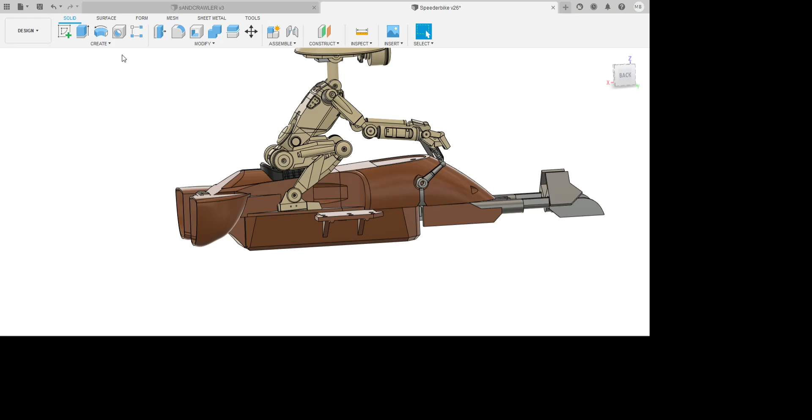Okay, let's talk about the Pit Droid. So this is Pit Droid Racer. What I'm not going to do is go through the drive builds, so the wheels and tracks and all that kind of stuff. They're covered off on the Brew and the Eggbot fly-through videos. So I won't go through this. I just want to go through the main model for the speeder bike and the pit.

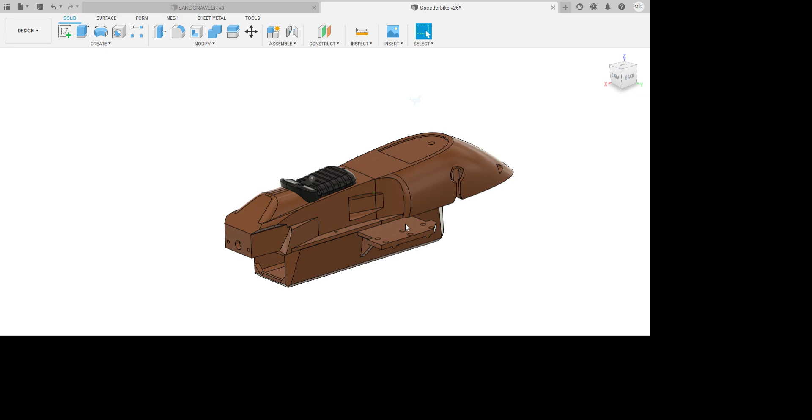So I'm going to just get rid of the Pit Droid for a sec, and we'll talk about the main frame. So the main frame is quite simple. You've got a base frame, and then you've got some other parts. I'll just get rid of some of the greebles that are on there so you can get a bit closer to looking at how the actual core build really is. So there we go. So really the main frame consists of three parts, which is this main frame at the bottom, and then these two upper skins. So if we remove the front skin and the rear skin, that's your main frame.

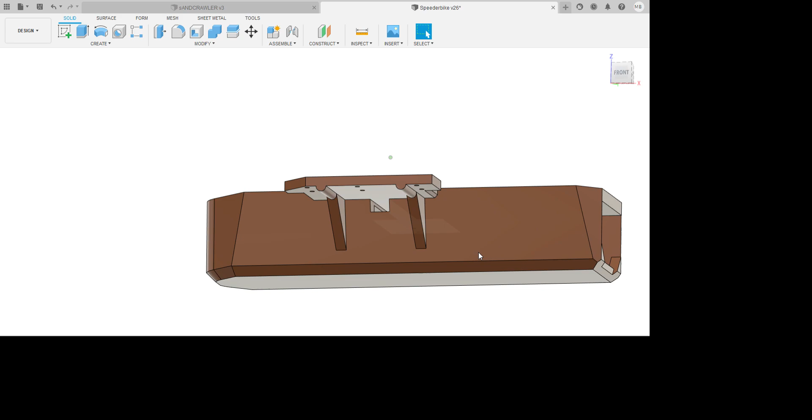Obviously it prints this bit bottom up, you've got bridging that goes across there, so it's all no supports. There's enough room in there to get a battery in and to get some of the electronics in there, and then effectively rather than having the metal bars through, I've now got a printed frame with these which screw into the same places where the original brackets did. So it's a bit of simpler assembly, and then you've got two holes there and there just underneath the wings, and they're obviously for the drive cables to get them all into the centre bit. Front compartment for RC, and then battery will go through. And then effectively that's your main frame.

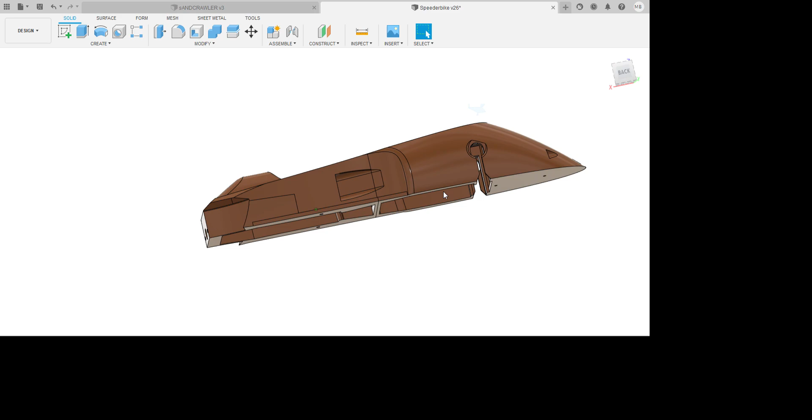So you can assemble your main frame and you can put your wheels on it, and then what you do then is you start to assemble the top half. Now the top half is made up of two skins, the front skin and the rear skin, as you can see. They are bolted together through these little holes here. What I tend to do is glue it, two-part epoxy, and then get some 3mm bolts through there with nuts on the other side, sort of 10-15mm. I've also put a 15mm hole through there which wasn't on the beta files. That's so that you can run the servo cables from this front part into here. You will need some extended servo cables, just to get it all to the one part where your RC is.

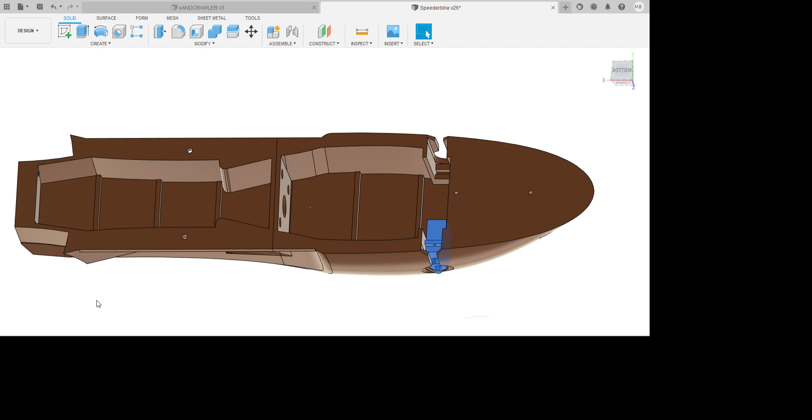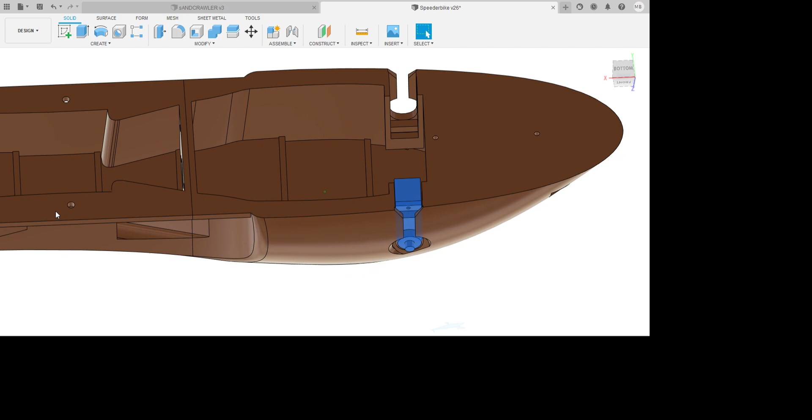Now what I've also done on this one is the servo mounts. I don't know if you can just see there, but the servos just slot into them grooves, and the top tab goes into there. So in this model the front servos are not screwed in at all. What you do is you pop your two servos in, make sure they're in that little latch there, and then there is a servo mount which basically clicks in and locks that in place, and I can just show you very quickly how that kind of works.

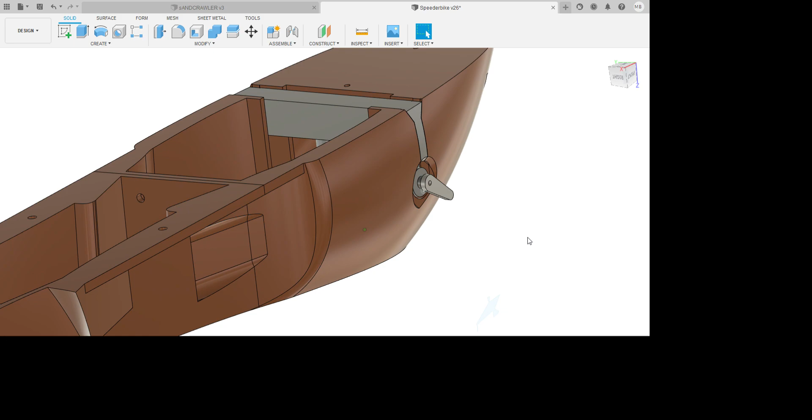If I go to a bit of sectional analysis, the servo drops in, clips into there, the servo is closest to the top, and then that slots in. It's got a little groove again for that other part of the tab, and then it bolts in or self taps in from the top with an M3 screw, which holds those servos nice and tight. So that's just how that goes in. So you drop your two servos in. Obviously center your servos as always with a servo tester or whatever. Screw that in, and that will hold your servo in on both sides. The servos are for the main drive arms, so you get animation on the arms, and then these just bolt together. So that then creates your main frame.

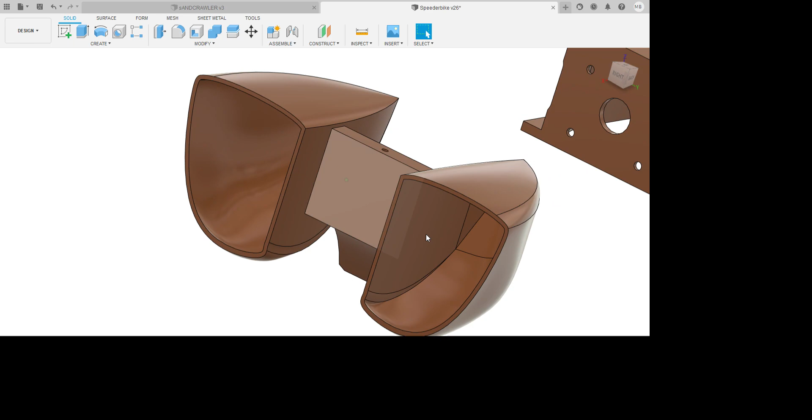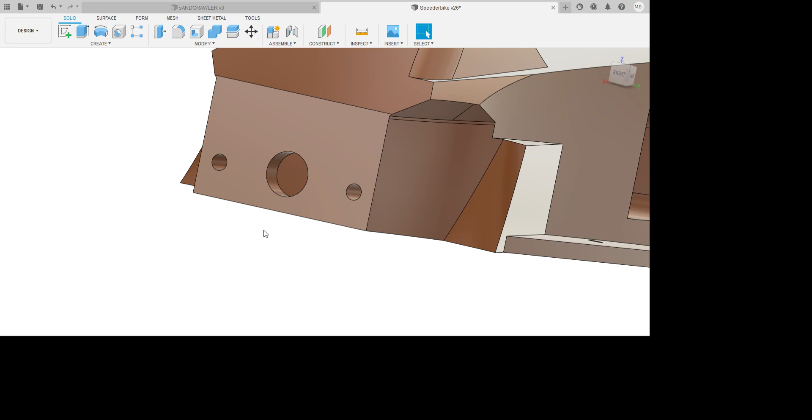And then on top of the main frame, at the rear here, you've got a magnet and two locating pins, and that's for the rear jets. So the way the rear jets work is you've got a hole there which you glue in a 10mm diameter by 5mm deep magnet, and you also put in two little long M3 screws through there. And what they actually do is they just stick out, and then on the rear skin you have two little holes here and here that they'll drop into. Not designed to screw into there; they're just designed to sit into there. So with these magnets, you can actually pull the rear jets off, or if they catch on anything, they'll just pop off, and you just stick them back on with the magnet.

Because they're printed in this orientation, this plate here is a bridge. It'll look pretty messy, don't worry about that. What we've got is a greeble then that sits over the top of it. So the greeble sits over the top of it, you screw it in there, and it just tidies that back up and gives you a nice kind of finish at the end. But as I said, the rear greeble and the jets will come off and on. Okay.

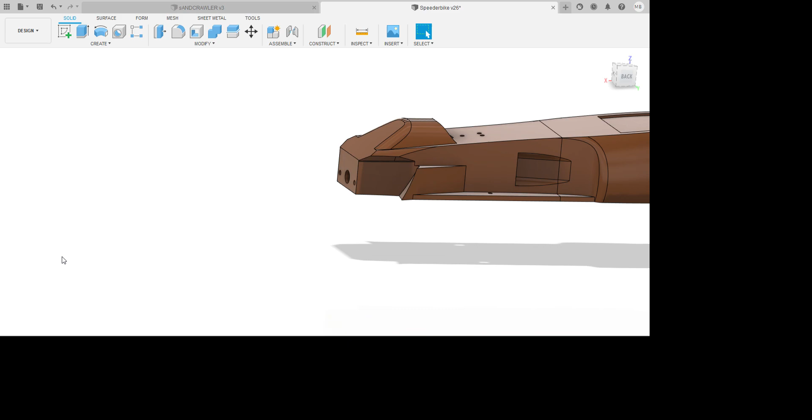So once you've done that, you put your magnets in, you bolted it all together. That's pretty much your lower frame completed. Two servos in either side, and then you've got the drive arms. Now just talk through the drive arms.

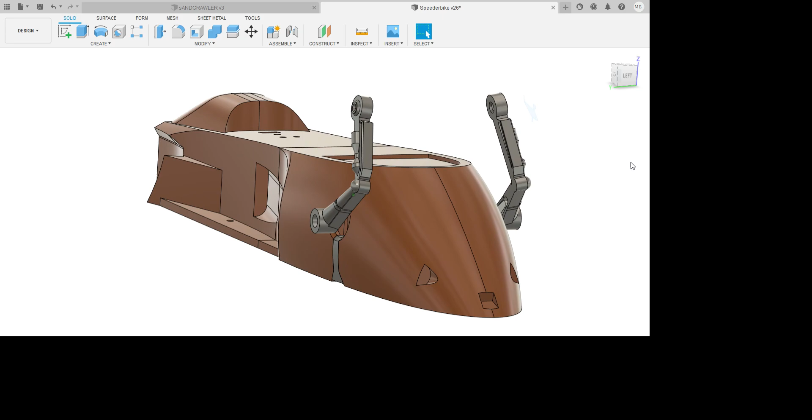So the drive arms are actually at an angle. So if you look at it from the front, they're not straight. They print with these bits here flat, but the little groove for the servo is actually at an angle. So if you look at how that servo horn is actually connected, let's just get rid of the magnet so you can see the servo horn doesn't sit straight, it

sits like that. 2-part epoxy, glue it in and make sure that hole there is centered, and then the reason for that is it gives it a better angle for the hinges for the arms. It just looks a bit better with it not being completely straight. So both of those go on, glue them on, center the servos and pop them on.

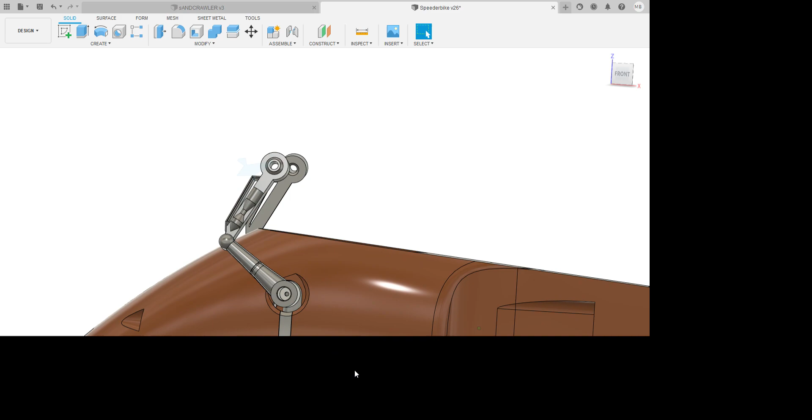At this point I wouldn't put the screws in until you've got the driver on, you know, the pit droid, so you can actually make sure you get that right. Single screw through there which holds that bracket in. I haven't done, but I will do a plate that covers over here that's got a little bit of a console on, just to tidy that up. I've not done that yet, but hey.

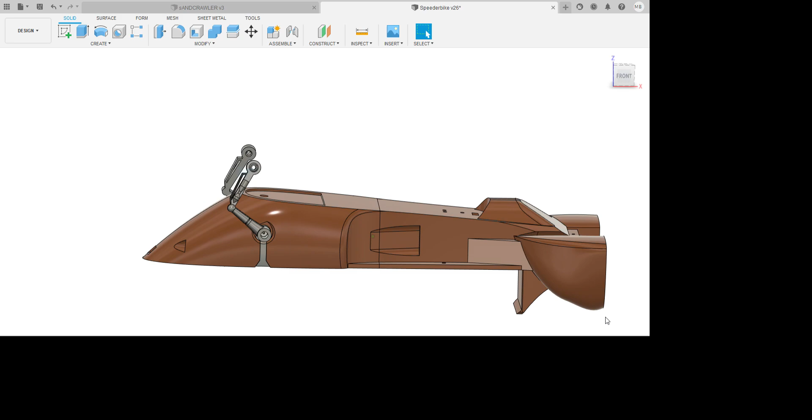And then your rear skins pop on there by magnets, and then effectively that screws into here with 2 holes there, and then there's a little bit on the front one. So those 2 screws there also hold the pit droid's feet. So I'll talk through that when we get to the pit droid.

At the front we have the vents. Now the vents is again a 2-part print. This one prints with this bit to the base, and then that just clicks on and you can glue that into place. It holds in place with 2 screws, one there and one there. They both self-tap into that plastic, and then when you put the main frame on, you can see that can

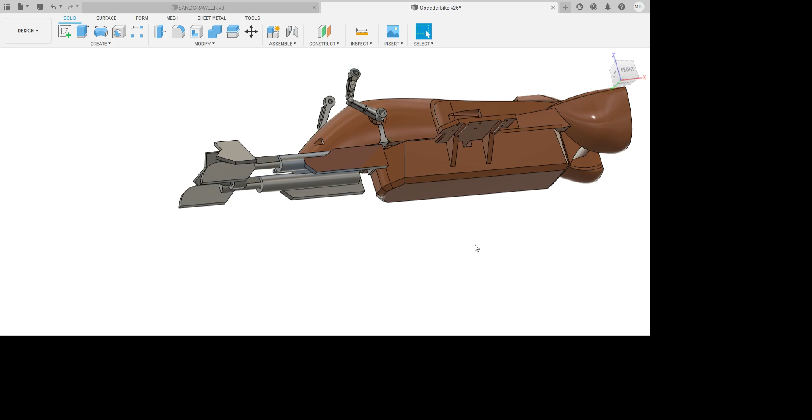also screw in there. So this top bit is held on with 1 screw at the front which holds this piece here on once this is all assembled, a screw there and a screw there which go through the pit droid seat, and that's it really. So if you want to get it off, it's fairly easy to take off. You've then got that rear greeble I mentioned, and then the only other part really is the seat.

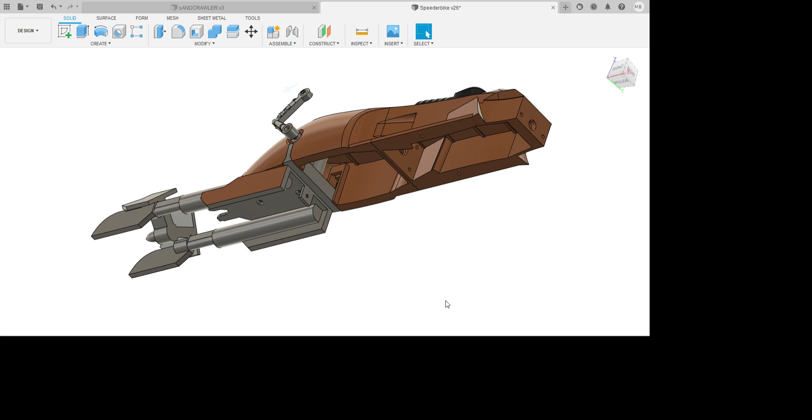At this stage, don't attach it to your main frame. You wait until you've assembled it. So when you've done your main assembly, your rear jets will be on via magnets, and it'll go onto the main frame. So really, you want to just assemble this piece like this. Then you can start to work on the pit droid.

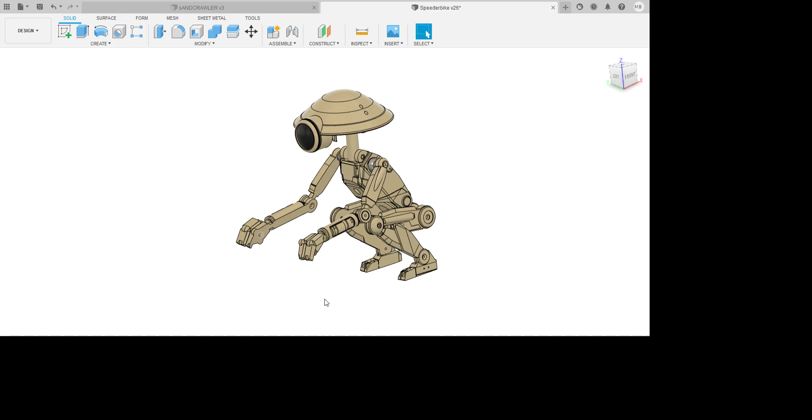Okay, so I'll talk through the pit droid. So here's the little fellow. Let me just first of all remove this speeder bike, and I'll talk through how he's made up. Start with the easy parts first. The arms. You've got 2 arms.

These are from the great model from Dave Moog, who gave me the model to play with. I've altered the sizes and scales, and I've tweaked it and changed it, so it's not the same model as Dave's at all really, but he's provided the core layout and design for that, which is fantastic.

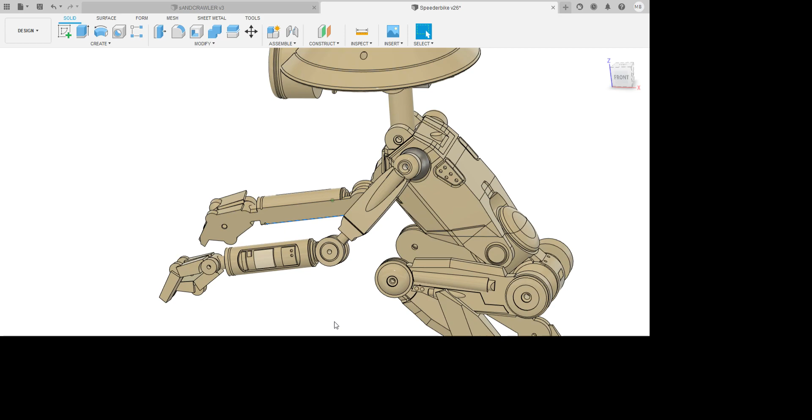So these arms print flat, single bolts through from the inside to create this hinge. You want these arms to be loose and floppy, and then you've got a second arm comes up to there, and this arm bolts on to here. I think it's about a 25mm bolt that goes through there, and these shoulder hubs are loose. All this is loose, it's just held together with bolts. You don't need to glue anything.

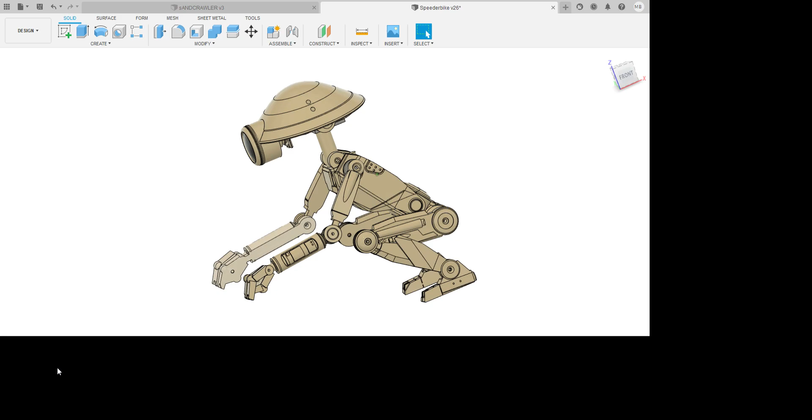So that's the arms. The arms are fairly simple, and can be attached at any time. So I'm just gonna remove the arms for a second, you monster. Let's get rid of the shoulder hubs. We'll go through the legs, which is the other easy bit really. The legs are one piece, so as you can see they're printed like this.

You couldn't bend the articulated pit droid like this because it would clash into each other, but what we've done is just done that as a single print for you. And then you've got some little hips, again similar to the legs. You don't have to actually tighten these on hugely. These won't move anyway, so you can put a bolt straight the way through there, get it nice and tight, and then effectively that's your legs.

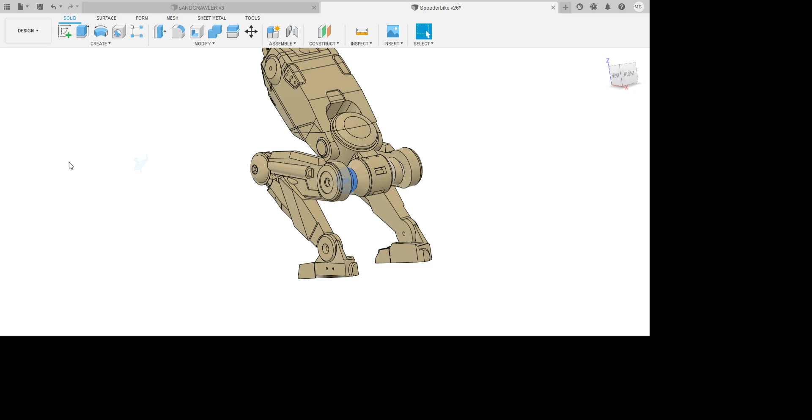But the assembly, your legs you put on last really. So when you're assembling this, leave your hip and legs off, and I'll show you why when we actually come to put that in. In fact, I can probably show you now. So I'll show you how this fits onto the speeder bike.

So the way that the pit droid fits on is, as you can see, there's two little screws, one there, two bolts. These are M3 bolts. They go through the feet, they go through this frame, and then they self-tap into that main frame. So effectively it holds his feet on, onto there, right the way through. The feet are on solid. That's how the feet are held on.

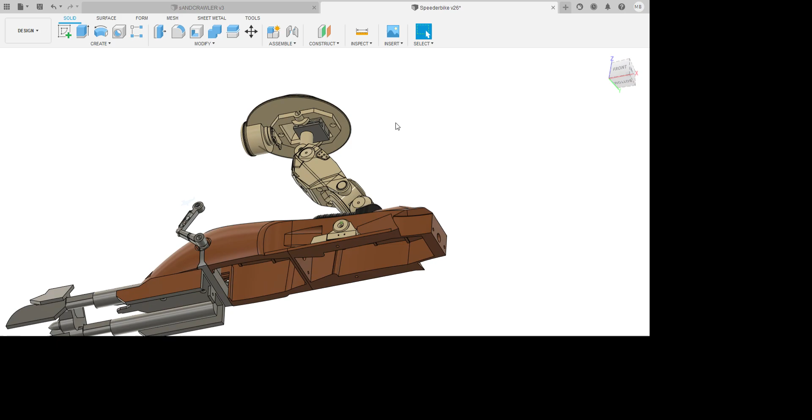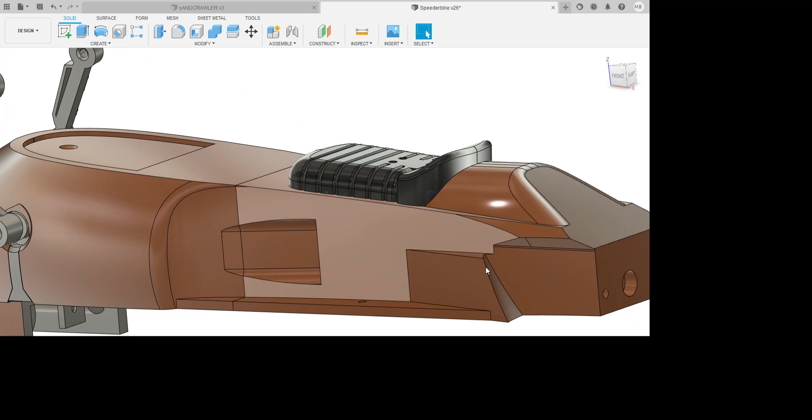The main body, once you've assembled this, and we'll talk through this assembly, your assembly is held on, just remove the pit droid, there we go, is held on with 3 bolts in the seat. 1, 2, 3, and these go right through from underneath. You can't see the holes there because I've put a very thin layer on to stop the bridging, but you have 3 bolts that go through the seat, and they screw into the base of that pit droid, because that's a pretty small area to hold that pit droid up. So you've got some chunky old screws that go right the way through there to hold this on.

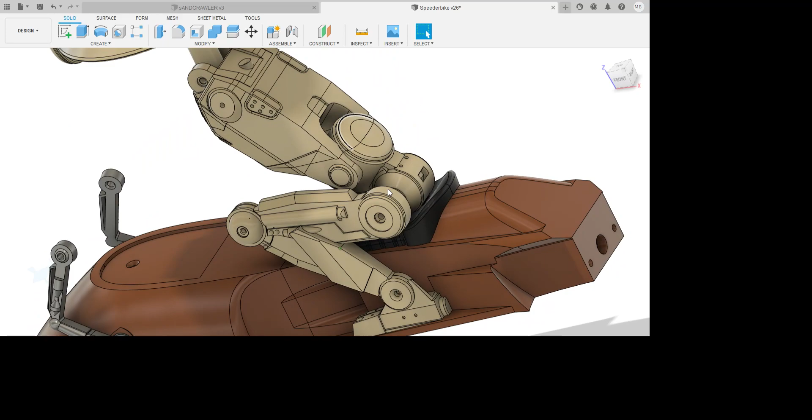So that part screws on first, then your feet screw on, and at that point then what you can start to do is attach the legs, which bolt into there and then bolt from the outside of the feet on. Again, M3 self-tappers, as most of my builds use at the moment. And then once you've got legs on, your legs kind of sit like that. The legs also give a bit of extra stability to the body. So that's how the legs go on.

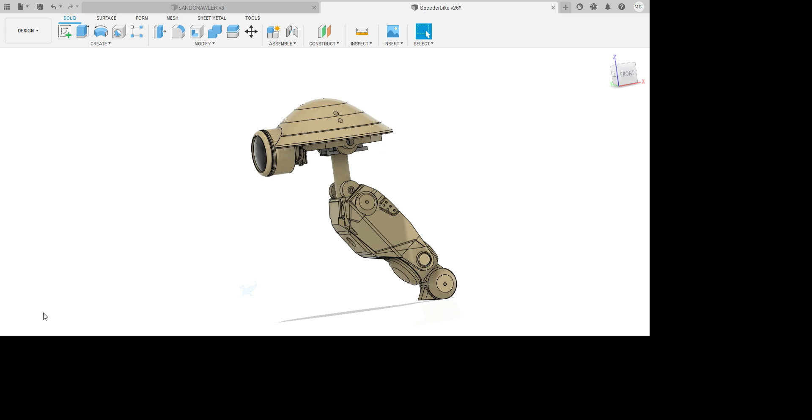Right, now let me just talk you through the actual body of the pit droid, because all these, they're almost like greebles, the arms and the legs. They're fairly easy to pull together, but we'll talk through the main bit. I'll just take his head off, because again his head just bolts on, so let me just take his head off for the time being, and I'll talk through how this is actually assembled.

So this is the main mechanism. You've probably seen the videos. His head turns left to right, and it nods, and it goes up and down. So this is how this main mechanism works. So before we start to look at how that's put together, I'll just show you so you can get a visualization of how the mechanism is by just taking a bit of a cross section.

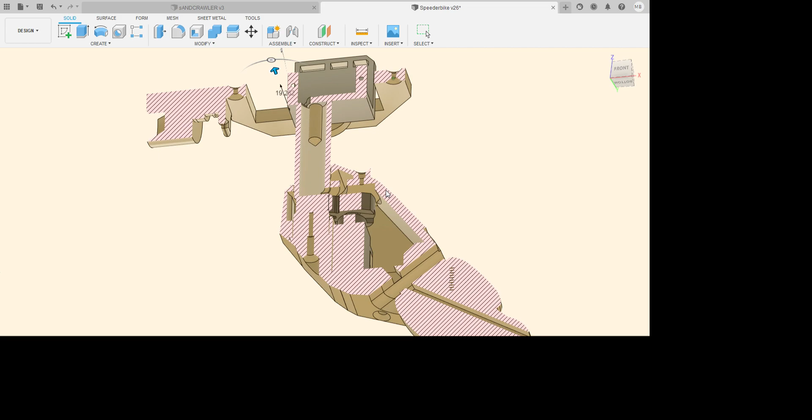Oops, not that much of a cross section though, mind you. Bear with. All right, there we go. Let's pull that back to there to get about halfway through that neck. Okay, so what you've actually got here is, if you can see, there's a servo in the bottom. The servo has a gear attached to it, and that's probably not the easiest way. Let's see if we can see this a bit clearer. There we go.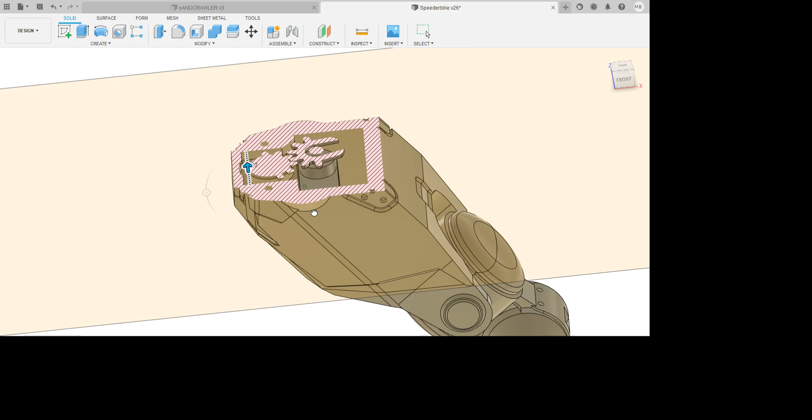So if we look into the body, you've got a servo, which you can see there. On top of the servo is a gear, and the gear meshes into another gear. And this gear is actually part of the neck. So if I continue the neck up, you can see then that the neck goes in. So the way this works, if I just remove a couple of panels, is servo in the bottom, gear, and a neck. So that effectively allows you to turn the head left and right like that.

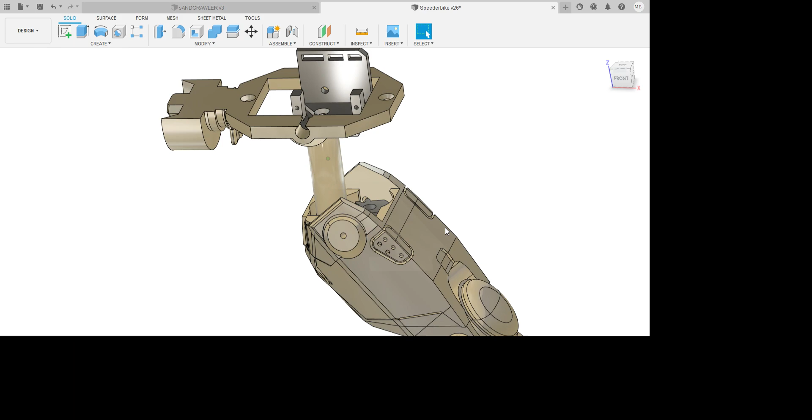Then what you've got in this top bit is another bracket here for another servo. So you've got a servo that goes into there, and you glue a servo horn in there. You also put a bolt through this hole into there, so that then creates the hinge that allows you to, if I can do it, nod the head as well. So that's how the head turns round and nods. 2 servos, one to do the nod and the other one to do the head turn.

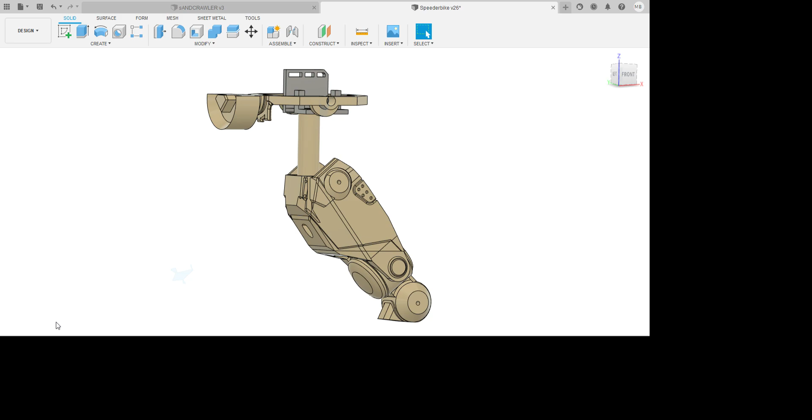The way we assemble this is the actual body comes in 2 parts. So there's a lower body here and an upper body there. Okay, so the first thing that we do is, just get rid of some parts so I can see how we assemble this. So the first thing you do is you just drop your servo into there, as you would do.

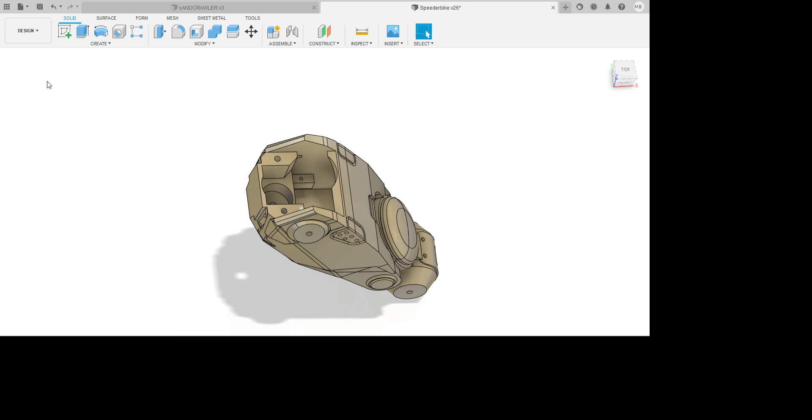The servo itself is an MG90 servo. It drops into there and it screws in through those 2 holes. The cable for the servo, which comes out of this side here, if you can see, will slot underneath this little gap, and then what you've actually got in the body is a little channel at the bottom here, a little hole. So what you need to do then is just drop the servo cable through that little hole.

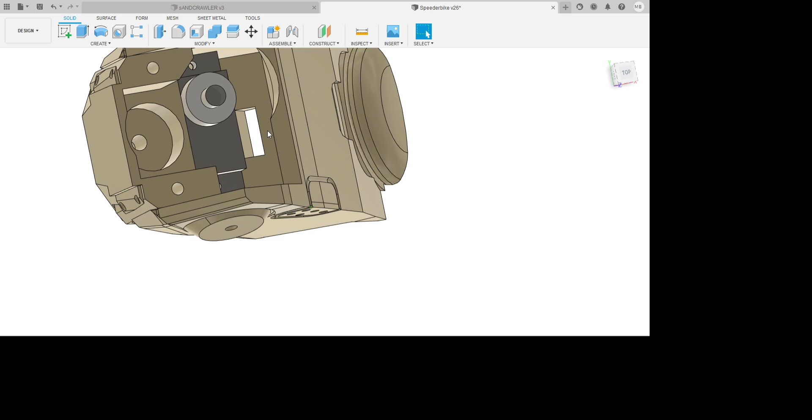So the way you do it is pop your servo cable through the hole. Once you pop your servo cable through the hole, pop your servo in, 2 screws, tighten it up, and you should have a cable dangling out of here. Okay, now the next thing to do is to get a good length of servo cable, because you'll need a second servo cable for the head. And what you do is you thread that through that hole along with the connector for this one.

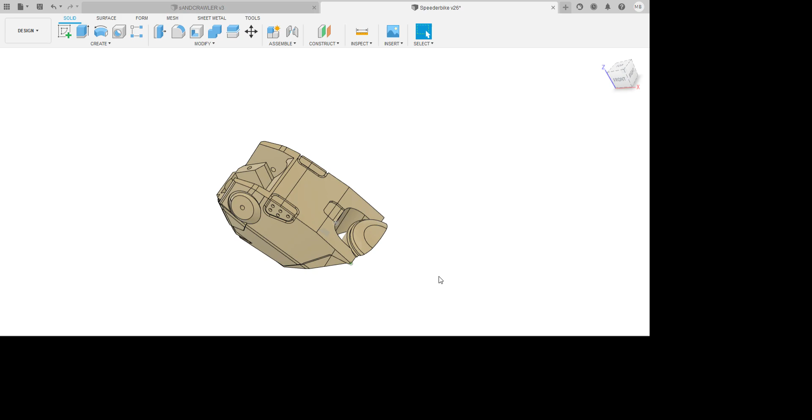So what you end up with is 2 cables. You end up with the actual servo cable, and then just a length of servo cable not attached to anything, going through there, which is going to be connected to your upper head. Then I'll show you how the lower part fits on. So the lower part fits on with 2 bolts, which are self-tapping, and that holds it in.

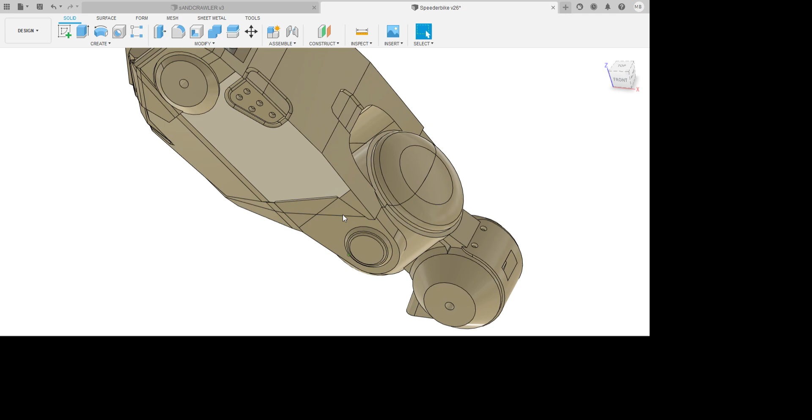And then you've also got a hole here for an M3 set screw, so a 3mm set screw or grub screw, which is 10mm long, and effectively that holds that body together with 2-part epoxy. So 2-part epoxy, you glue it, and you can get that fitted in near enough straight away. Before you do that, what you want to do is thread the cable. So you'll see there's another hole in the body here.

Now, if this is tight, you can sometimes get a needle file to file through there. There's some overhangs in there that may mean that when you push the servo cable through, it's not completely smooth. But push your servo cable with an end, i.e. the servo cable that does this servo here, right the way through, so it comes out and it'll stick out through here. Then it'll come out through this hole and out.

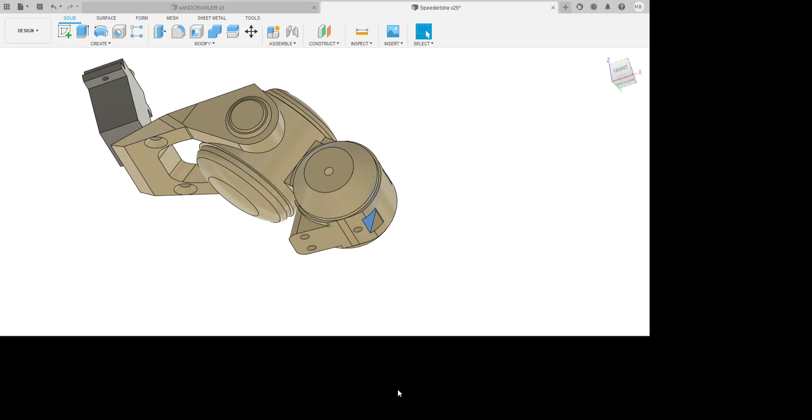Then what you do is you take that servo cable and you push it back in again down this second hole, so it comes out here. So you end up with the cable gone right the way through, bending down and actually coming out that bottom there. And then the second cable, which is just a 3/4 servo cable without any ends on it, goes the same route. So it goes straight down, out, back in, round, and out that bottom.

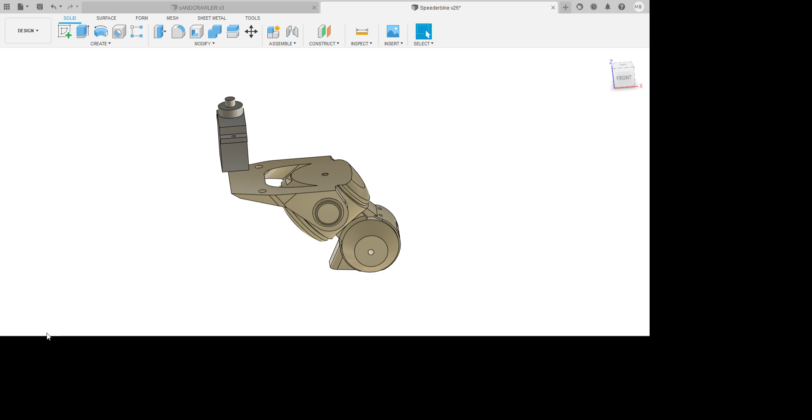So effectively, once you've then got the main body on, the 2 cables come right out at the bottom there. They bend round there. You'll probably see them through that little window. They'll fit between that hole there and that gap there, and then they'll come out into this space here. One will connect to this cable so that you can turn the head. The other one, I'll show you where that routes in a second.

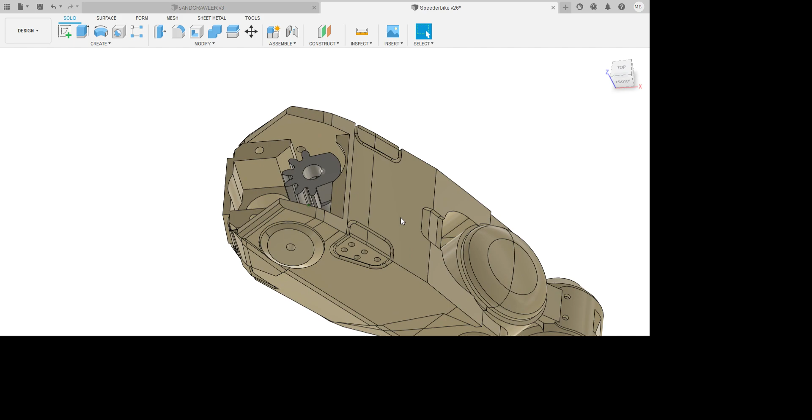So once you've got the cable sorted out, the next thing you can do is put the gear on. So we can put the neck gear onto the servo. Again, simply, it's got a little groove on the bottom, and you can glue a servo horn onto there. Once you've got the servo horn in, make sure the servo is centered and angle it like that. So what you want is the gear pointing straight towards that little hole there in the middle.

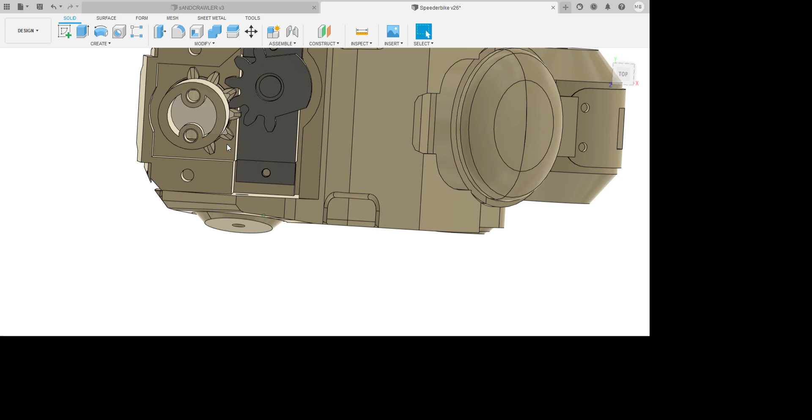And then what we can do is grab the neck. So the neck goes in. The neck drops into there and it meshes, as you can see, with that gear. Again, make sure you get your servo angled like that. So you want these 2 holes here on the neck aligned to those 2 holes in the body, and that's your servo neck in.

Now before you put the servo neck in, we've got some cabling to do, and what we're trying to do is get the cable to come out at the top there so we can use that to control the nod servo.

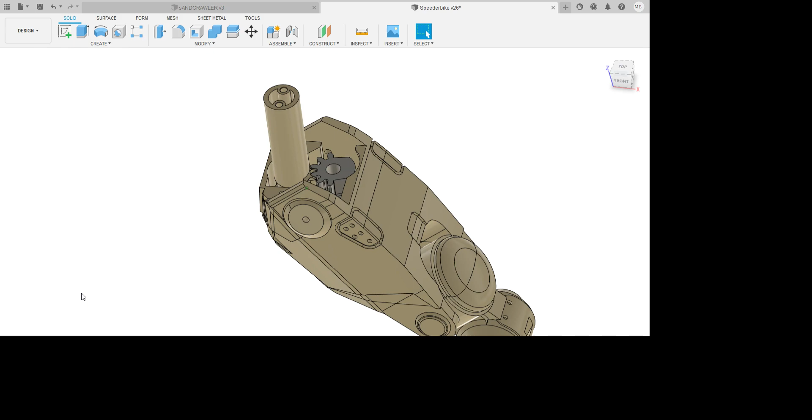So I'll talk through how that cable goes. Okay, I'll just show you how the assembly goes. So we've got 3 parts to this assembly. We've got the neck, we have, find the parts that I need, we have the shoulder cover, there we go, and then once we've got the shoulder cover, we've also got the shoulder.

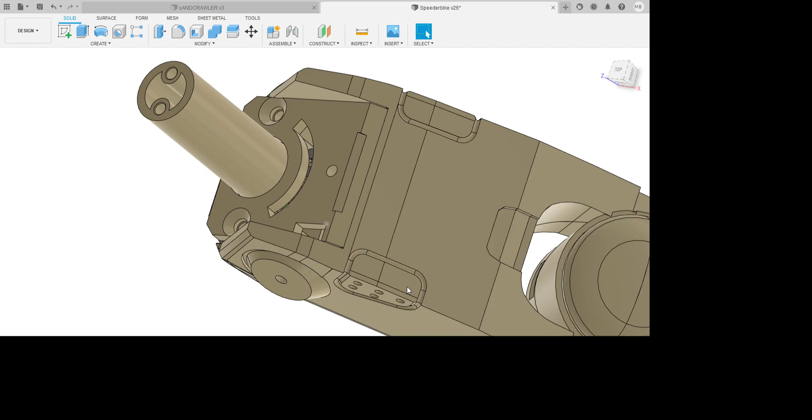So there you go. So the way that this works, we've got a happy smiley face, look, it's good, isn't it? So the cable that's from the bottom comes out of this hole here. Doesn't need to be threaded through this because this is an open hole. So you're pulling the cable out of here, and then it goes back in through the smiley face. And the smiley face is really designed so that you can push the cable through and it'll allow the head to turn, and it sort of drags the cable around.

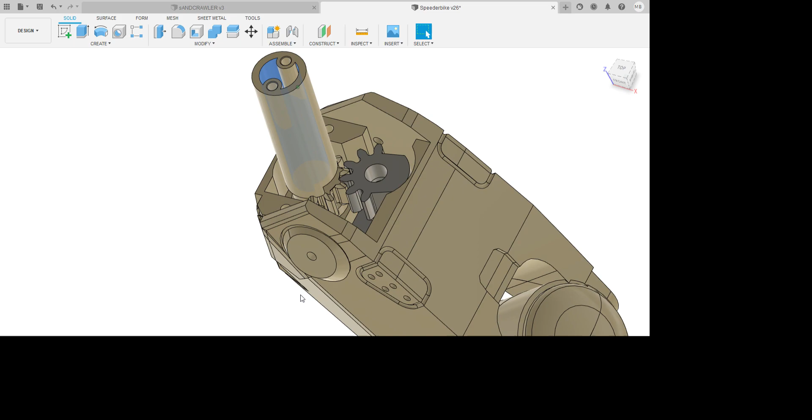So if you can imagine, up out through here, back in, looped through there. Once it's looped in under there, you'll see there's a little hole at the bottom of that gear. It pushes into that hole and then it spins and it goes right the way up and comes out of here. Okay, so there's a couple of ways you can do it. You can feed it through there first from the top out through there, put it through that shoulder plate, push it back up through here and then drop it back down and thread it all the way through so it comes out the bottom.

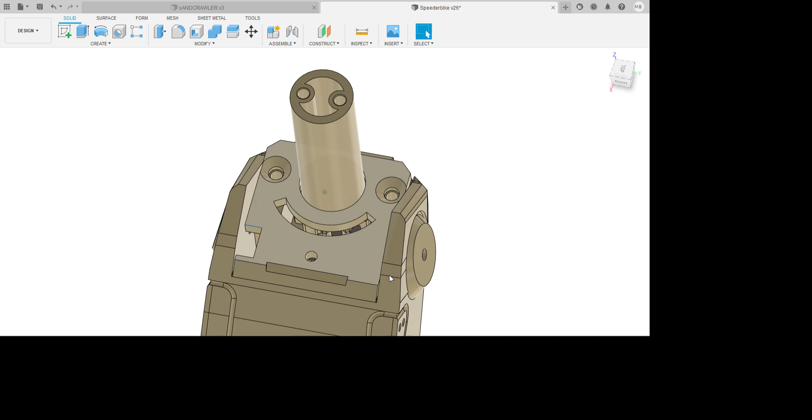But that's the length of the cable, so through there, all the way through the body, into that space, out through this hole, back down through that hole, into the hole in the neck, and out the top of the neck. And what you'll end up with is a little loop of cable that goes kind of like that. Now there's quite wide grooves on there, so the whole cable doesn't shift left and right when you turn. It's just to give it as much space as possible.

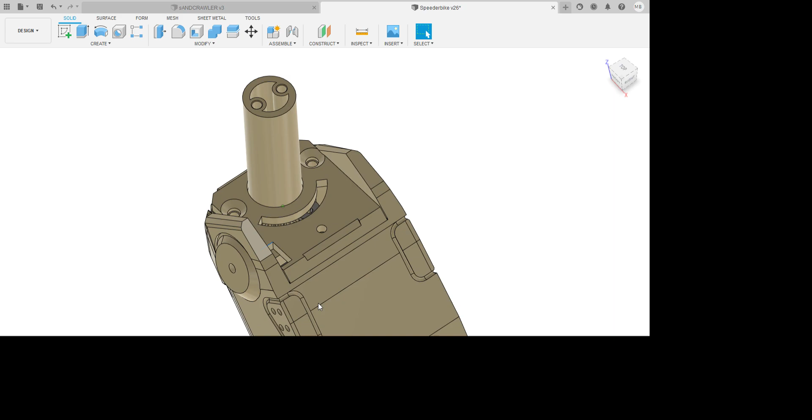But what you want to do is attach a servo tester to that head turn servo. Make sure that head turn servo turns relatively freely with that cable on, because what you're then going to do is this shoulder cover bolts in with 2 bolts there and there, and 3 bolts self tap. And then finally you've got a shoulder cover that goes over that.

Now the shoulder cover, if we look there, as you can see, has got this gap so that it allows the cable to come out of here back in there. There's not a lot of room, you've just got to make sure that you've got enough space there for it to be moved relatively freely. I built a couple of them, it does fit, it's just sort of playing around with it to make sure that you've got enough movement for the servo, etc.

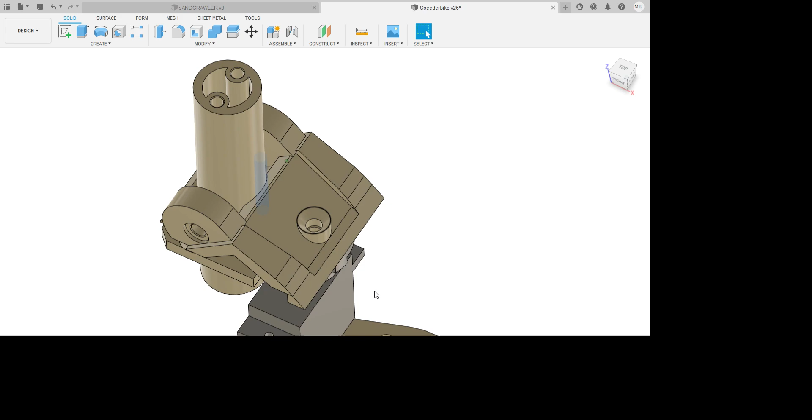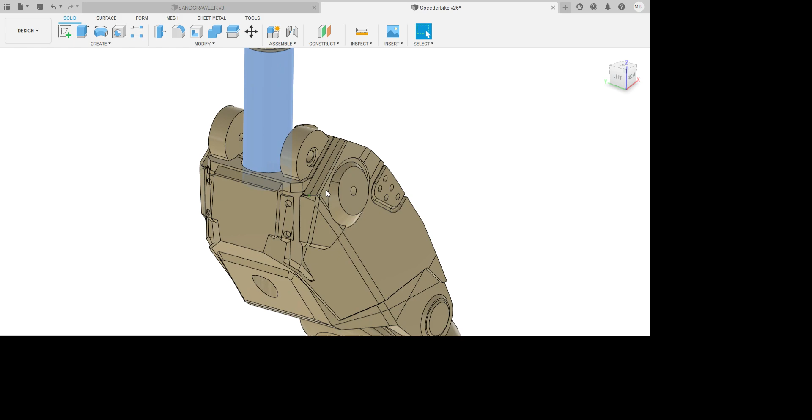And then you've got a cable that comes out of there, and then finally you've got one more self-tapping screw that holds this shoulder in place. So the body is a little bit of a complex build, but that's what we've got to do to get the animation working. Once you're happy with that, there's another bolt that just goes in here, and it bolts through there and into the neck. Now that's like a hinge, or a pivot should I say.

So what you really want to do is tighten it up so that the neck gets in there and it's tight, and then loosen it back a couple of turns so that the neck can turn left and right, but it's not rattling up and down. So you want it to be loose but not completely loose, and you can put a little bit of grease or oil in there, whatever you want to do to try and free it up and make it a little bit smoother. It won't wear away, and to be honest, there's not a lot of movement in there, so it works pretty well.

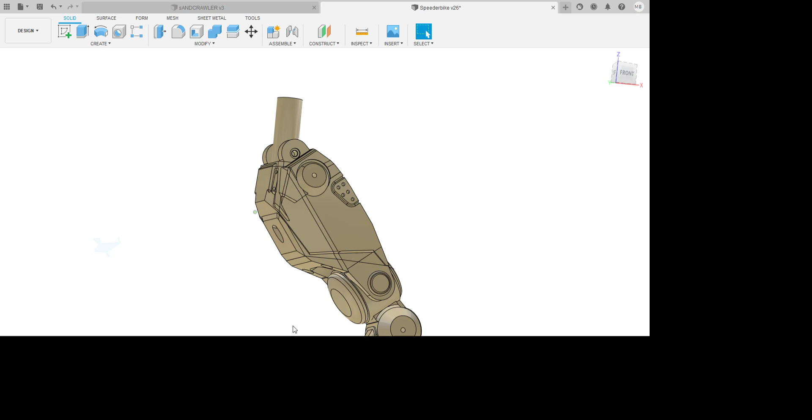Once you've done that, bolt that shoulder plate on. Obviously you paint all these before you do this, it makes it a lot easier. Bolt through there, and that's pretty much your body and your 2 body assemblies. And that's the more complex part of the build, because the next thing that you would do is start to put on the top part of the head.

So the way the top part of the head works is, first of all, there's a head plate which bolts onto this neck. Now the cable for the servo comes out of this hole here, and there's a little bit of a groove here so that the cable can come out here.

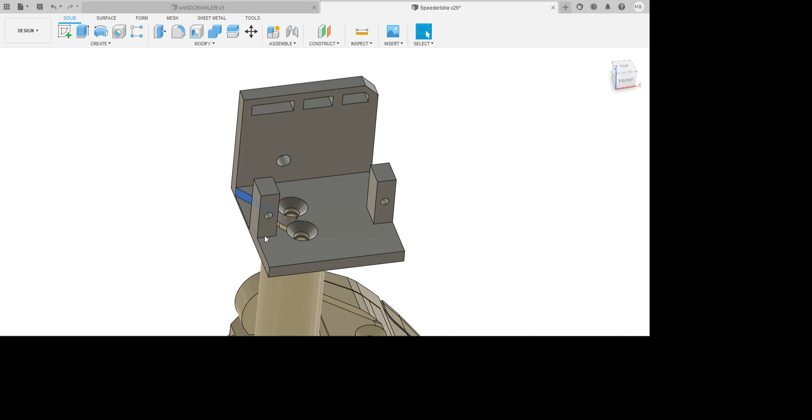Now ideally you don't want a lot of cable on there, so what we're going to do then is crimp a servo connector on the end of that, a male connector because it's going into the servo pin. Once you've crimped that on, or you can use an existing one, cut it off and solder it, however you want to attach it.

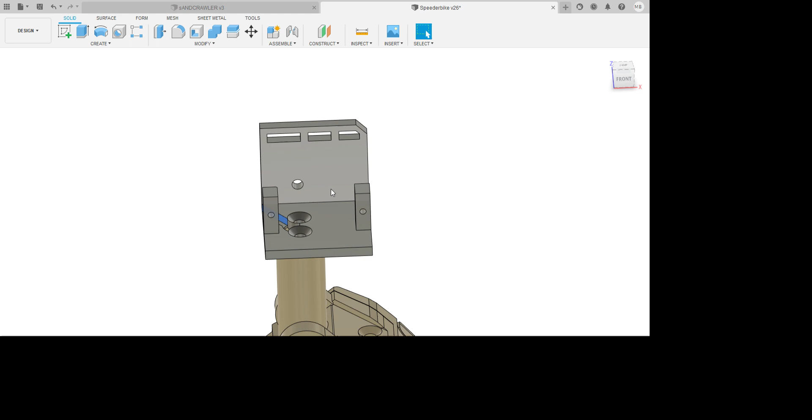What you do then is you pop your servo in. I actually cut the cables off the servo, shortened them quite considerably because I didn't need that length of cable, and it's all tucked away in the head. So put the little MG90 servo, it screws onto here. Actually, I don't think I've got a servo in this model to show you how it fits, but it screws onto there, and effectively then what you've got is the lower part of the actual head.

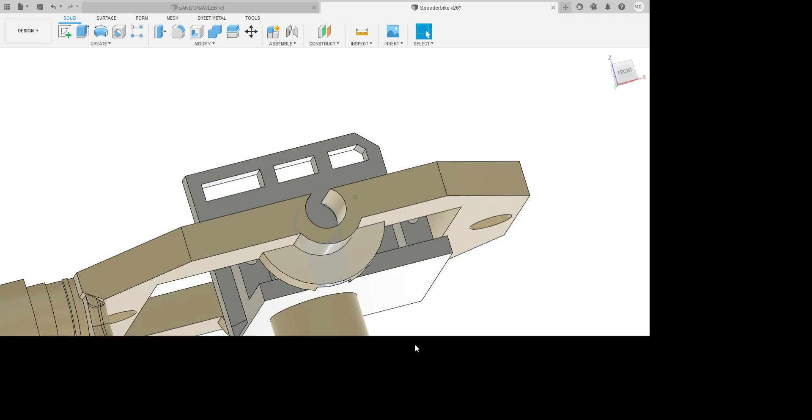And so the way that it works, your servo drops into here, your servo horn glues into there. So what you do is you glue your servo horn into that, facing down, trim off the end so it's a bit neat, drop your servo in to there, screw it into there and there.

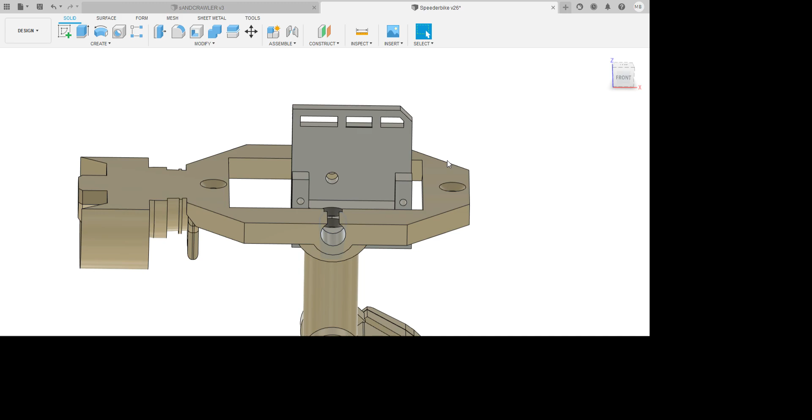You've got your cable from the bottom coming out through there, you've got your cable from your servo which will come out through here, and then what you really do is grab the two, connect them, and then you've got some holes at the top there which lets you use zip ties just to secure those cables. I trimmed back quite a bit of the cable and put new connectors on just so I didn't have too much cable kicking around.

So servo horn in there, and then once you've done that, pop it in, screw your servo horn in, and then you put a self-tapping screw that goes through there and just rests into that hole there, which gives you your pivot for your head to move. And that's your head assembled and connected. At that point you can connect it up to a RC or to a servo tester and make sure that your head nods and it turns before you start to add the rest of the assembly.

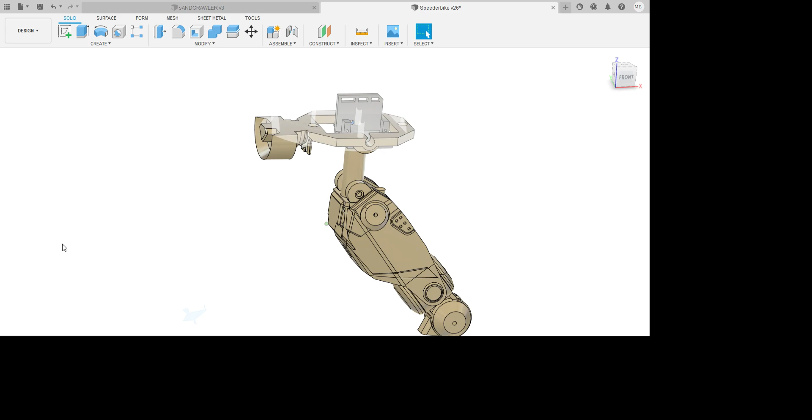Now then, the next bit we'll look at is the dome. So the dome fits on top like that. It's really simple, it just bolts in two places, which is there and there. With the servo you've got a lot of nod movement, so you can nod the head up to put one screw in and then nod the head down to put the other screw in and tighten those in.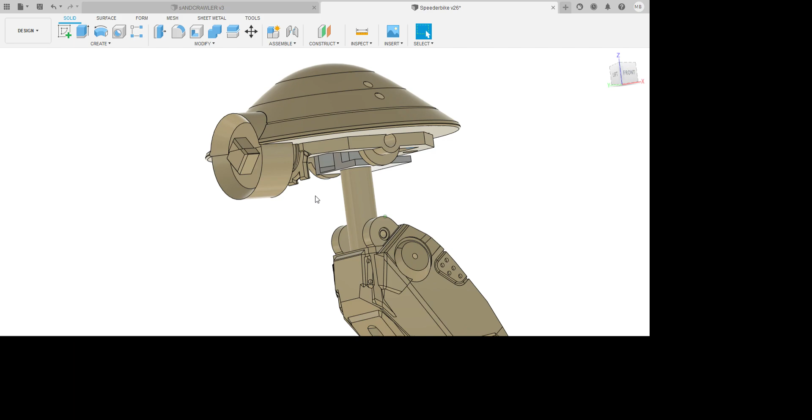You'll see what I've done is tried to simplify the print as much as possible, so the whole thing prints in two prints. It looks like the model's moved a little bit offset, so we'll move him across a bit and neaten him up while we're here. Might as well. Do it by hand. There we go.

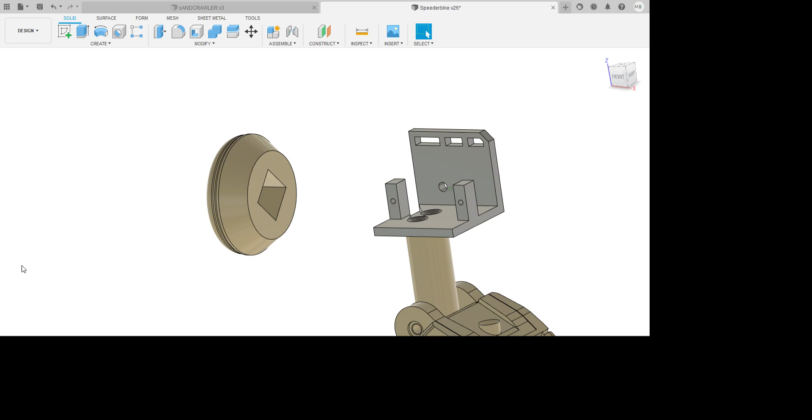So what you've got at the front then is this little diamond. You'll screw in nice and tight through those little holes. You've got a diamond in the front, and then the actual eye goes in like that. There we go. So that just pops onto the front of the dome.

How do you fit it on? Originally I thought you can glue that on, but actually that gives you limited access to the servo. So what I ended up doing is I just put a tiny bit of Blu Tack into here and pushed it on, and it holds incredibly strongly, but it does mean that if I need to I can just pull it off to get access to the head again.

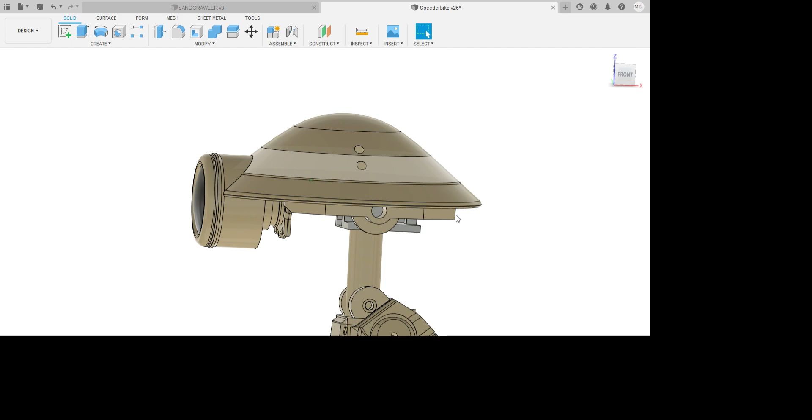You've also got two holes here which are 4mm diameter holes, which allow you to put aerials. I haven't put any printed aerials because 4mm is quite small, but what you can do is use filament rods. There's quite a few different things you could use if you wanted to put the two aerials off the back of the pit droid, or you could just leave him as is. It's pretty cool. And then that's pretty much your assembly for your pit droid. So as I said, what you then do is you pop all of the arms on.

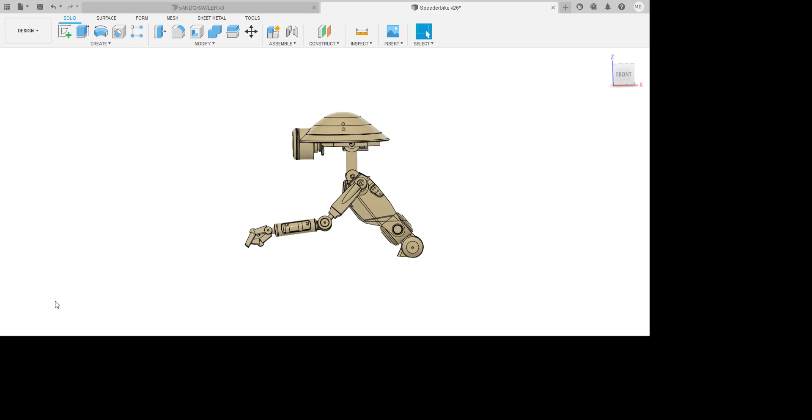The arms will just flop around like some gorilla, and then you pop him onto the speeder bike like that. Bolt him on with those bolts underneath. You'll see that there's also a groove in the seat that goes right the way through to here for the servos. So you'll have two servos come through there.

You want ends obviously on both of them, and then you run the servo cables through that hole, and in this area you can pretty much fit your RC, your two servo cables that will come out of the two ones for the two arms. So you've got 4 servos in total, and it goes like that.

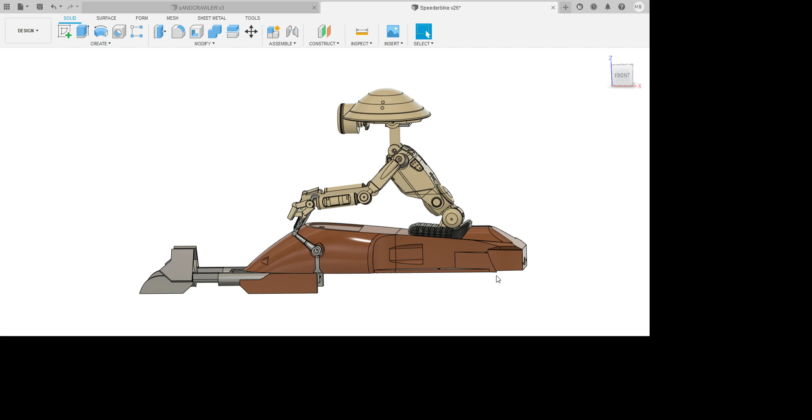Now on the other droids, what I've done is I split the signal which went from the drive servos. I split the signal cable and use that signal cable to power the control arms, which are these two. So what you end up doing is these will perfectly match what you're doing on the drive one. What I did with mine on this is I actually run on the servo controller, I run these on channels 5 and 6. I run the head nod on 3 and 4, and then the drive on 1 and 2.

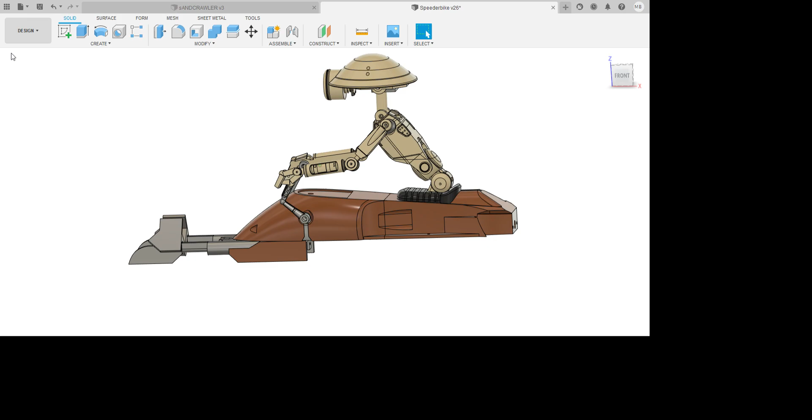The reason I did that is I wanted to control a little bit more the actual distance that these go. I was experimenting to see if you could segment them, which you can do. So the way it works now is a little bit complex, but I've got a mixer. I've got a speed controller that does the tank mix for you. So the speed controller takes 2 signals, which is left, right and forward, back, and effectively it mixes it into the 2 channels. So therefore I've not got to use the mixing that's on the RC.

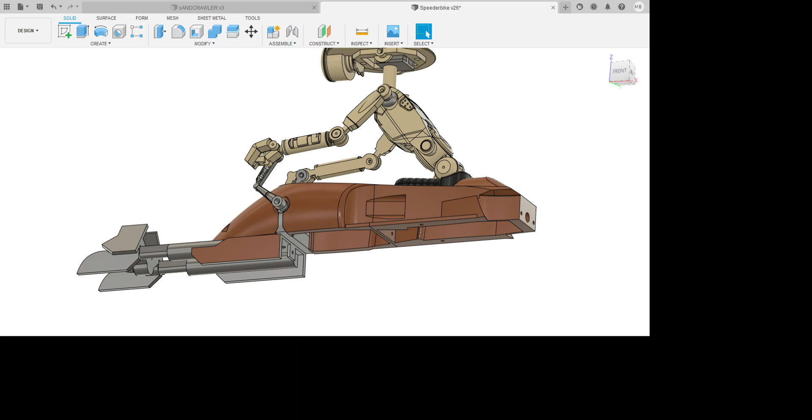And what I did do then is I used the 2-channel mixing to mix the channels 1 and channel 2 to these levers 5 and 6, which give me a bit more control as to how far they actually went. It also means that just using the little spinny knobs on the RC controller, I can actually control these independently, so you can do little pre-flight checks before he shoots off. So it's a neat way of doing it. You can of course split the signal like you did on the other ones. Both kind of work. So just a little bit to talk through how the RC part fits together.

So once he's fitted on, you've got your 4 signals, you've got your RC gear in there. And then effectively you've got your rear jets, which will just fit on by a magnet, and you've got the main frame that fits in there. The reason these come off is if you pull off the rear jets, you can get access to the battery hole. So if you've got a switch in there, or you want to just disconnect the battery and whatnot, you can do if you've got the right length cable.

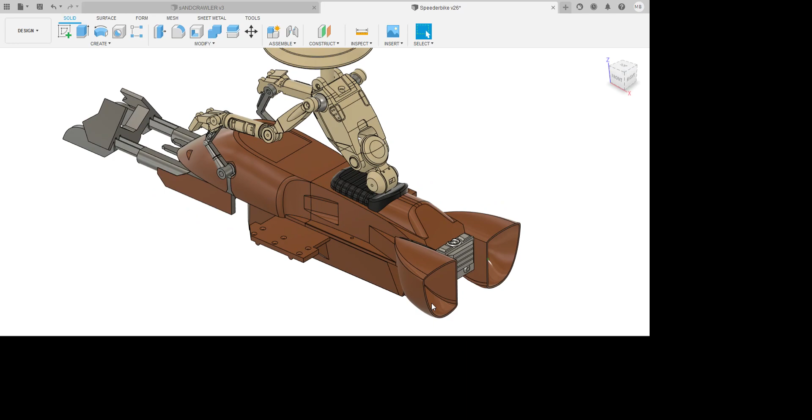And then you pop that back on, and then the next thing to do once you've got this top bit is you stick it on the frame and you've bolted in the 2 feet. So the 2 feet bolt straight the way through and hold the frame in, and then finally you've got your legs and the hips. Now what I've got on here is I've got these bolts that go through to hold them legs.

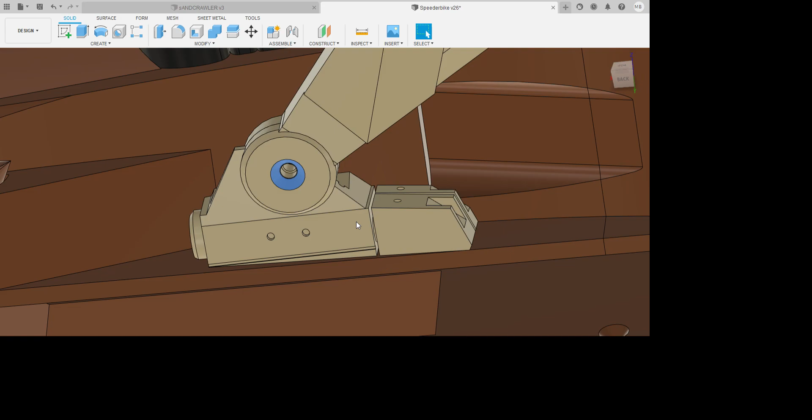Actually, with these ones that are in the hip, these legs are fairly tight, so what you can do is push the legs into position and not put a bolt through there, which is pretty much what I did. The reason that's useful is that these legs will actually just spin round out of the way. I'll show you what I mean by that. So your legs will actually kind of move. You can grab hold of your legs and you can move them like that, and then it allows you to get a screwdriver in there to remove that top frame off.

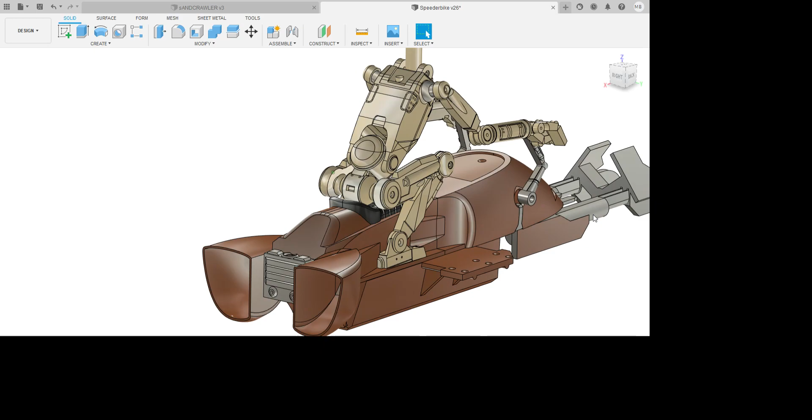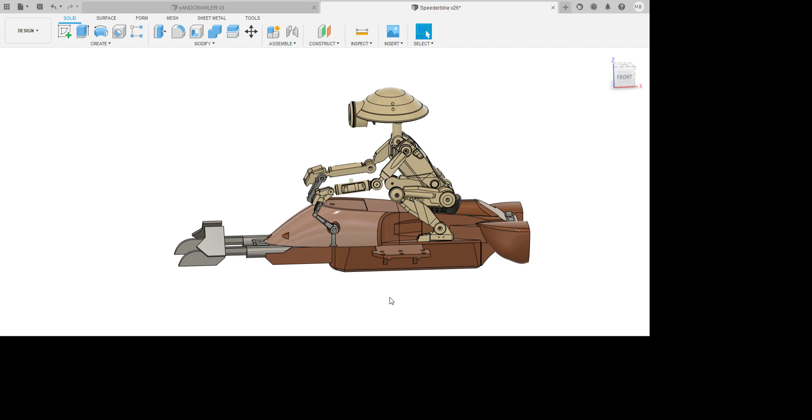So you can literally have it fully assembled and just spin your legs back to take this top frame off if you need to get access to your RC control or anything like that. But yeah, screw 2 bolts into there, and then pretty much that's your assembly. You've then got all of the usual battery in the middle, RC controller, the 6 volts or the 5 volts out of the speed controller powers all of the servos, and on mine of course you can add a UBEC if you wanted to, which is another little power converter for the 6 volts if it's not managing to run at the same speed.

And all in all, folks, that's pretty much it. So hopefully that was a useful overview for this little pit droid racer. It's a cool little thing. Nice little model, one of my favourites I think up to now, and got lots of personality when he's whizzing around, and he does off-road extremely well.